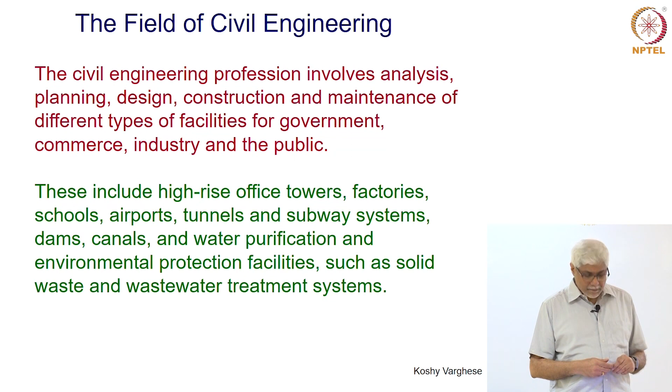So, these could be government facilities, these could be for businesses, industries like factories, shop floors and so on, and facilities that are used by the general public like bridges, roads and other such installations. So, here we see some examples of facilities that are

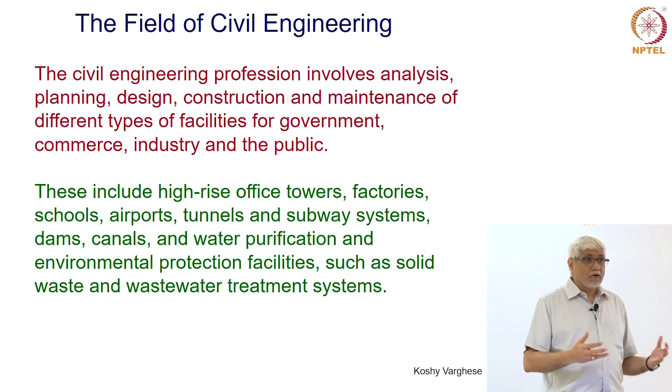created, managed by civil engineers: high-rise buildings, office towers, residential buildings, factories, schools, airports and other transportation facilities like tunnels, subways, and also other systems which are needed for providing drinking water and also for treatment of sewage, dams, canals, water purification systems and others that we need for protecting the environment.

We want to make sure that the sewage that is created from all these townships and offices is treated properly before it goes back into the environment. So, this would be a broad definition of what is the field of civil engineering, and the purpose of civil engineers in society is that they coordinate the needs of society.

So, broadly when we talk about civil engineering, it is a response to what society wants or society needs. So, civil engineers coordinate the needs of society, they see what is required and make it happen within the limits, within the feasibility that is technical and economic.

Technical meaning what? It is doable, it is possible with the technology that we have here, it is possible with the resources that we have here, manpower or raw materials. And the scope of civil engineering is mostly determined by economics. It is cost also, because somebody has to pay for these facilities and it is the public which directly or indirectly pays for these facilities. So, there are limitations, there are constraints due to the economics.

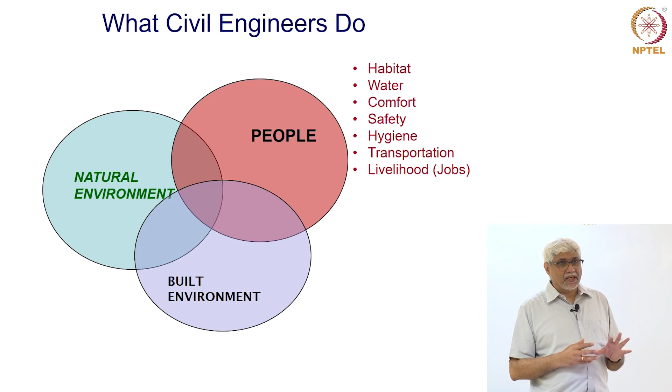What are the aspects or factors that could be important? When we talk about people, civil engineering concerns where they live, that is the habitat. We want a comfortable place where people can live. We want to provide facilities like water. Drinking water is a requirement of everyone.

In general, they should be comfortable. So, the place given for people to live and work should have proper ventilation, should have proper lighting, and they should be able to be comfortable when they are living there or working there.

Safety is important. Safety against any type of threats, people, the environment, natural hazards. Suppose there is an earthquake, suppose there is a cyclone or a hurricane. We want to make sure that our facilities keep people safe.

Similarly, if there is a flood in a city, we do not want the buildings to be unsafe. People inside the buildings, in our facilities that civil engineers create, they should be safe. Hygiene is important. So, that means that pollution, wastewater is treated, mitigated well.

People have to move within cities, from one city to other, city to rural areas, back and forth. So, transportation is very, very important. Nowadays, we spend a lot of time moving people and goods back and forth. So, it is very important that transportation facilities are good and people waste as little time as possible, spend as little time as possible in moving from one place to the other.

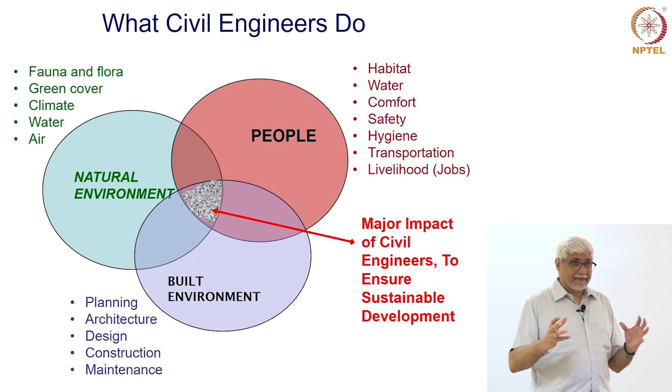So, this is the whole system that we have to consider. We have people, we have the natural environment, and we are building this environment to satisfy the requirements of people without hurting the natural environment. So, the major impact of civil engineering is where all this comes in, to avoid conflicts, to make sure that everything is done without hurting the environment too much, without it being too expensive, but responding to what people need. So, this diagram tells you where we are working in as a civil engineer and where the major impact is.

I will spend a little bit of time on the history of civil engineering, looking at some landmarks, and I will give examples as much as possible of India.

We can guess that human beings started off being civil engineers very early in the development of mankind. We can assume that people lived in caves, in shelters that they made, and probably adapted them. They chose the shelters or caves which were safe from wild animals, which were safe from floods and rain and sun, and probably adapted them to make sure that they were safer and more comfortable. Okay? So, this would be probably the first civil engineering accomplishment, where to live in a safe manner.

Probably when they found or discovered or invented a small bridge by making a tree trunk fall across a river or placed it across the river, that would have been the first bridge as a civil engineer. So, the origin of civil engineering surely goes back to the time when people started moving around and human beings started to behave similar to what we do today.

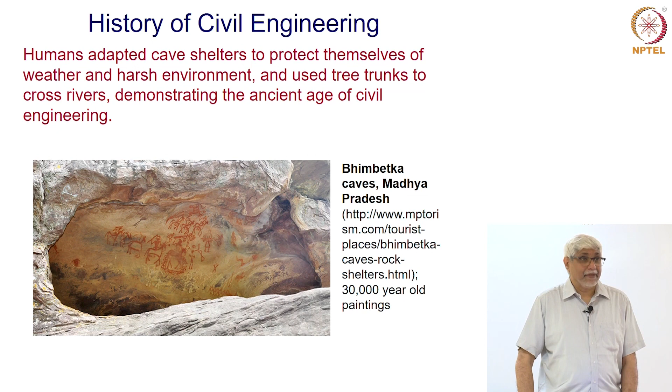There is a lot of evidence of people living in cave sheltered areas. This is an example of the Bhimbetka caves in Madhya Pradesh, where 30,000-year-old paintings have been found. So, that means that people have been living or had lived there 30,000 years or more. So, there is evidence all over the world that people lived in caves, and these caves had to be protected, or they chose caves that were well protected. So, this is the start of civil engineer as a provider of habitat, where people lived. How safe can we make that?

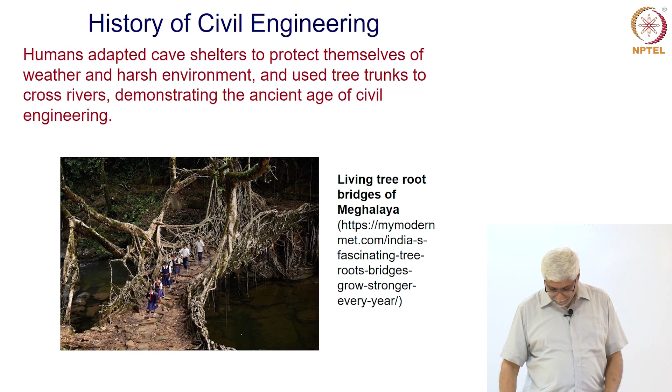They had an organized planning of where to live and where the habitats would be, and to move from one place to the other they had streets well designed, they had paving so that they could walk safely, probably their animals and carriages could also move safely, and they also thought that their sewage, the storm water should be directed in a certain way, not haphazard everywhere, but along a drain, and this drain would probably go somewhere. And this was even about 3,000 years before the current era. So about 5,000 years back from now, this existed. Okay? So people have spent a lot of time, effort and energy putting together technologies available at that particular period of time to provide these habitats and places to live.

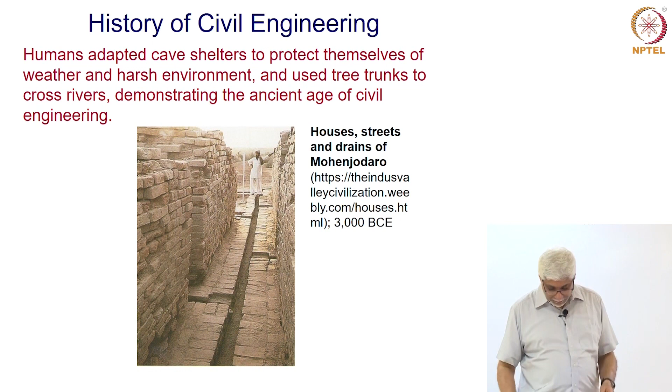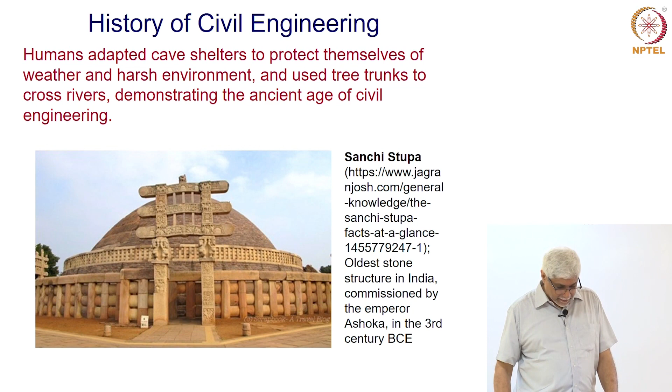So the technology, architecture had evolved, that stone could be carved into pillars and you could have an interior space created where people could live. It is not just the cave anymore, but a cave that has been modified. Or when there was no cave, it was just a huge piece of rock that was carved out into the habitat that people wanted. And this later evolved as an assembly of different elements.

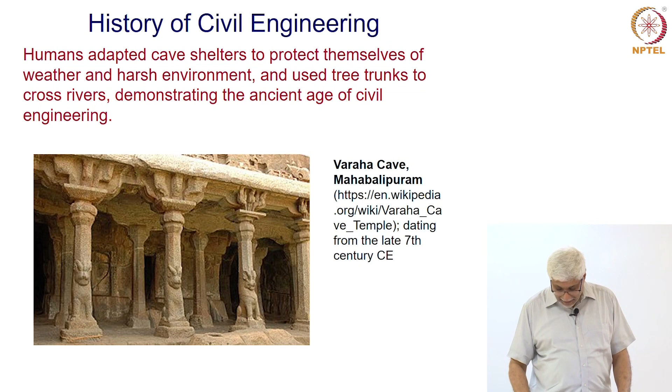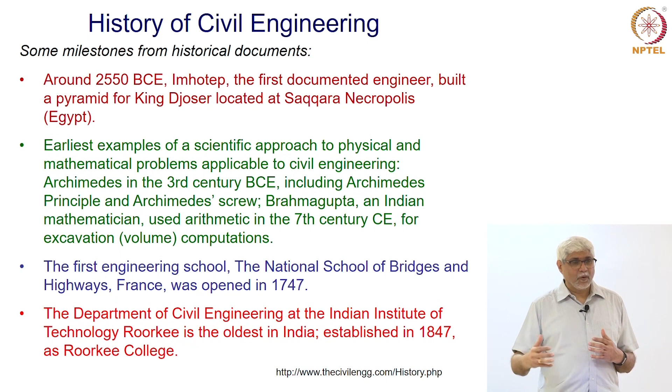A lot of times, and even now in Europe, architecture or buildings are not considered as part of civil engineering. They are considered more as architecture. But in India, we consider all built environment as the realm of civil engineering. In India, the oldest school of civil engineering, or the department of civil engineering, is in the current Indian Institute of Technology, Roorkee. It was started 100 years after the school in France, in 1847. Okay? So, these are some aspects of the formal way that we have documented civil engineering in our country and elsewhere.

So, now that we have talked about what is civil engineering, what does a civil engineer do? What would be the ideal characteristics of a civil engineer? Who should be a civil engineer? Are you going to be a good civil engineer?

So, a civil engineer should be one who enjoys problem solving, who wants to provide solutions, and wants to take action on his or her ideas, conceiving something that will be for the good of society, for the good of people, and acting on it, and looking at the problems that people have in cities and elsewhere and seeing how we can provide a solution within the resources that we have.

A civil engineer should have curiosity about how things work, why they work as they do, and can we improve them. Everything can be improved, right? With every year, the way we live improves, changes. Now, how can we improve it?

Within, again, the constraints that a civil engineer has. A civil engineer should also be interested and certainly be careful about spoiling the environment. We would like civil engineers to be those who improve the environment and reduce the negative impact of civilization, humankind, our built environment. It is going to have impact; we want the impact to be the least. And if we can recover from mistakes done in the past, harmful impact that we have created in the past, all the more better.

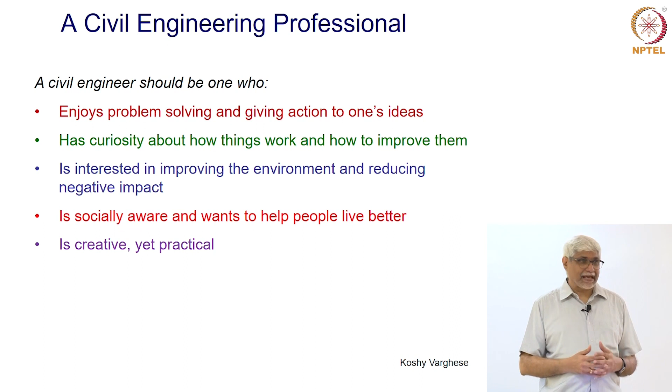The materials that we use, the systems that we use are very economical. Suppose you make it very costly, nobody will use it. A very common construction material that we use is concrete. Today the cost of concrete is just about 2 rupees a kilogram. That is why it is so popular, that is why it is so extensively used. If we make this same concrete 5 rupees, construction would stop as of today. So, it is very important that the civil engineer is creative yet practical, practical within the constraints that the civil engineer has.

What are the jobs possible for a civil engineer? It is endless. There are all sorts of jobs that could be possible for a civil engineer. Firstly, a lot of civil engineers work for the government and public sector organizations. So, they are involved in planning of projects, analysis of what should be done, looking at time and cost, preparing contracts, executing, managing the construction, overseeing contractors and workers, and then finally seeing if it has been done properly, and through the life of the structure or the facility, maintain it, rehabilitate it. At the end of the life of the structure, probably go to demolition as well.

Similarly, in industry, when you have factories, companies which are running with a lot of people, machinery, products coming in and out, again design is important. Where to put up a place, how it should function, what facilities it will require, what loads it will handle, how many people will go in and out, all this is required for designing the facility properly. Again, the construction: make sure that the design is implemented correctly. A design is a plan. Now, this has to be realized, and this means that the construction has to be done properly.

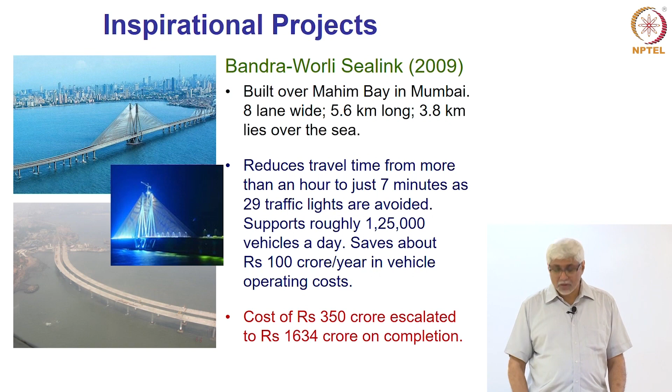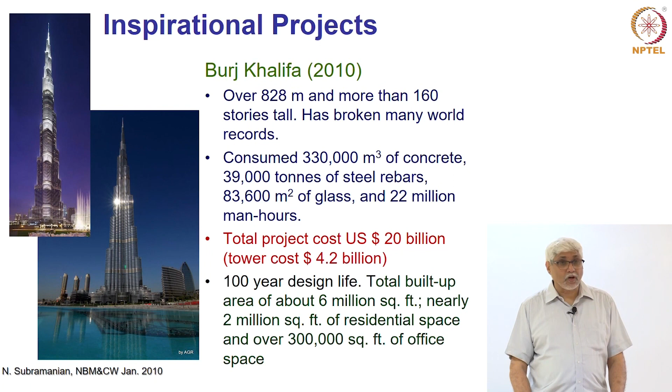The cost was about 20 billion US dollars, and it was designed for a 100-year lifespan. Now, most structures which respond to people's needs, which people generally use, would now have a design life of at least 100 years, and this is no exception. The built up area was 6 million square feet, and it's also now become the symbol of Dubai, where it is located.

Also close to Dubai, another engineering marvel was construction of land where there was no land. So, Dubai wanted more coastline, wanted more land, so they just created islands, and these islands are so big that in a Google map or a satellite image you can see these. So, these are large structures. They added about 522 kilometers of coastline to that of Dubai. The first two islands used 100 million cubic meters of rock and sand. So, in the sea, islands were constructed, and on these islands have come up buildings, houses, hotels, and so on. So, civil engineering is so powerful that you can create space for living, and in this case on the sea and where there was no land.

Civil engineering also can take you under the sea, and this is a very good example of the Channel Tunnel linking England to France, a 50-kilometer tunnel going under the sea, linking the two land masses. The lowest point is about 75 meters. So, it goes under the sea to a maximum depth of 75 meters.

It cost about 21 billion US dollars, and it helped 28 million passengers just in its first 5 years. 12 million tons of cargo went through the tunnel in the first 5 years. So, instead of using a ferry, instead of having to ship things between England and France, now people could use this tunnel and just drive through and have a train passing through.

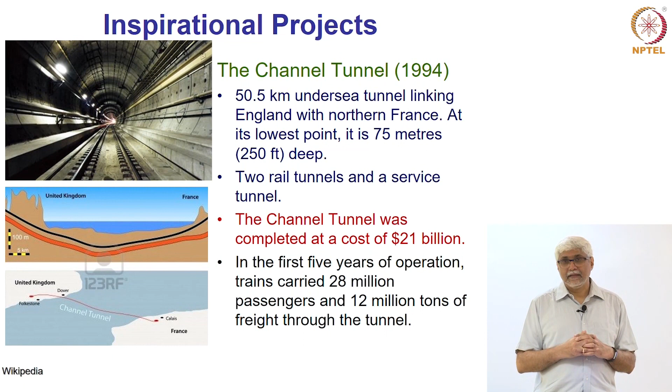Again, you can imagine the difficulties, the challenges of having a tunnel that is going under the sea. Obviously, it should go correctly in the direction that you want. It should not leak, it should not collapse. You have all this mass of water on top of it, and you have the soil also to support. So, again, very, very challenging, inspirational structure.

People also have been very inspirational. I will start with M. Visvesvaraya, who is said to be the best or the most famous civil engineer of our country. So, he was involved in irrigation structures, flood protection structures. He implemented the irrigation system in the Deccan area, designed a system for increasing the storage in a reservoir without causing damage to existing dams.

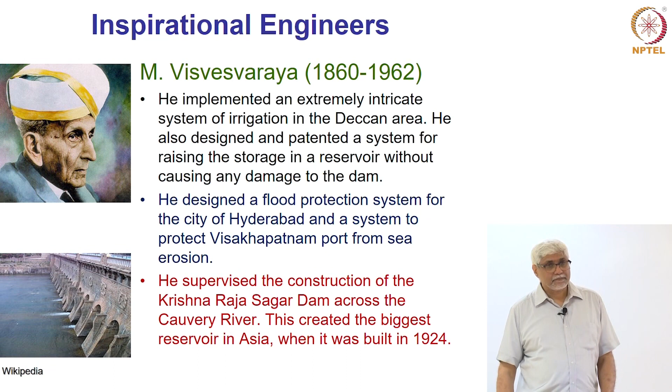For the city of Hyderabad, he created a flood protection system, and for the port of Visakhapatnam, he made a system to prevent the port from getting eroded by the sea. He personally supervised the construction of the Krishna Raja Sagar Dam across the Cauvery river, and when it was built, it was the biggest reservoir in Asia. So, we look up to him as Indian civil engineers to see how we can keep this legacy going. There are many people around the world that we can look up to.

One other person is Fazlur Khan, who became famous in structural engineering and was even called the Einstein of structural engineering for his innovative use of structural systems. His famous buildings were the John Hancock Center and what is now called the Willis Tower. Earlier it was called the Sears Tower, and for a long time it was the tallest building in the world.

And he came up with this system where he used bundles or tubes of steel. These were large tubes which made up the whole structure, and with this steel buildings could be made very, very tall. They could be strong, they would not deflect or move or sway, and provide the space that we required. So for a long time tall buildings were made according to his method of construction. This has now been transferred to the new hybrid systems of construction where you have concrete and steel like in the Burj Khalifa. But for a long time the methods of Fazlur Khan were used for all the tall buildings of the world.

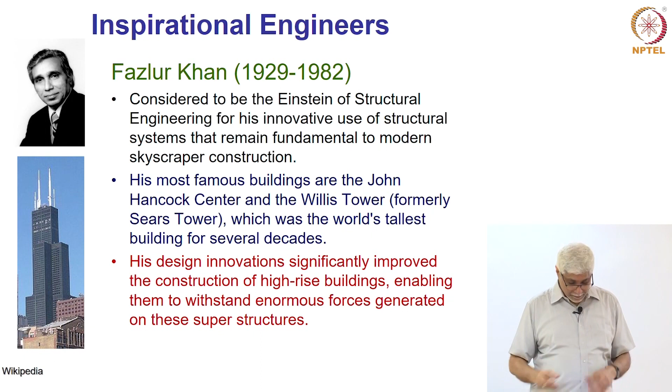In terms of management, a name that is very important is Stephen Bechtel, who was a construction manager par excellence. He always, it is said, wanted to take up projects that everybody said were impossible. He wanted to make the impossible doable. He was the main manager in the Hoover Dam. The Hoover Dam was built in the 1930s in the United States. Excavation of 3.7 million cubic yards of rock. They poured 4.4 million cubic yards of concrete. Massive structure in a very remote area to provide water.

His company, which is even today existing and very popular, built pipelines, power plants in the Canadian Rockies, built structures in the Arabian Desert and in the South American jungles in a variety of environments. He even built an entire city, the city of Jubail in Saudi Arabia. Overall, Bechtel was involved in construction in 140 countries and on 6 continents. So he was a construction manager who could execute anything practically everywhere.

So I'll stop there for now, and what we have seen in this lecture is what civil engineering is broadly about, what civil engineers have to do, what has been done, and what we can look forward to. I'll see you in the next lecture where we'll talk about the different specializations of civil engineering and give examples of what these specializations do and deliver.